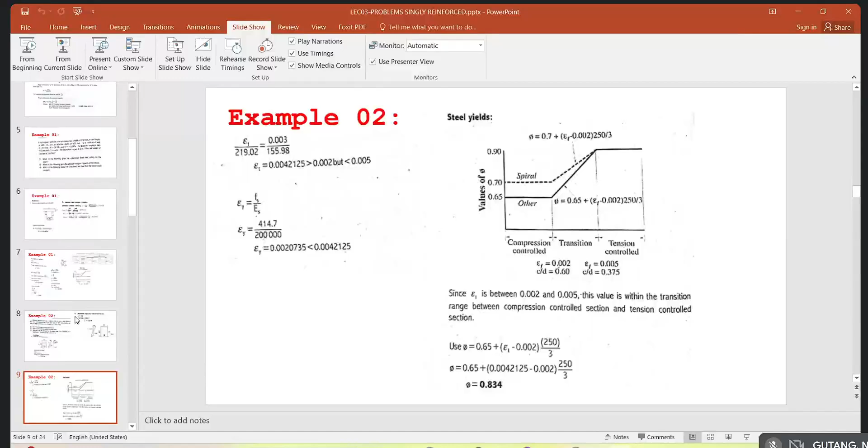Example number 2, ano ba yun? 246.78.

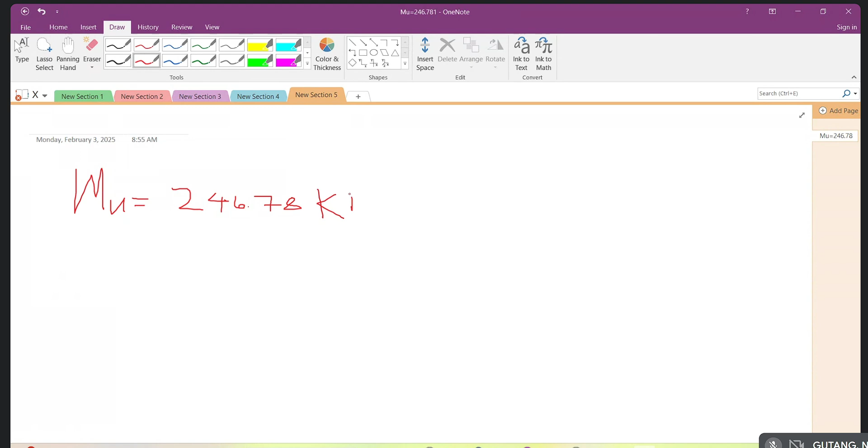Kilonewton meter. Now, so we know that our beam has a span of 6 meters. Ito yun, no? 6 meters. And our dead load is 21.6 kilonewton per meter.

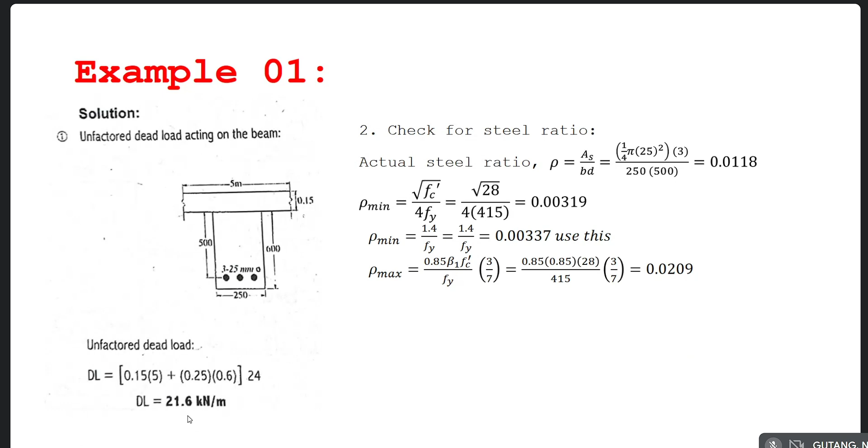So if you notice here, wala siya naghatag, no? If the beam is a simply supported beam or a fixed beam or whatever beam it is. But take note, no? If the beam is singly reinforced beam, mostly it is a simply supported beam. Okay? Kaya singly reinforced man siya, di ba?

Pag singly reinforced yung reinforcement natin is nalang sa tension side. Although naa sa compression side, but we don't need reinforcement at the compression side. So ang kailangan lang ng reinforcement is only at the tensile side. So meaning mura na siya og simply supported beam, di ba? Ang simply supported beam natin ingon ani ang moment diagram is ana lang, which is positive. So meaning we only need tensile reinforcement. We don't need the compression reinforcement.

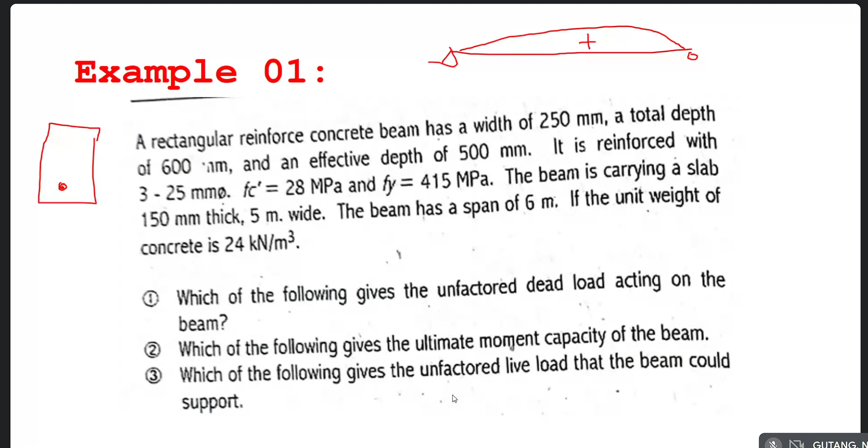So in this case, we are going to assume that the beam is a simply supported beam. So that means our maximum moment becomes WL square over 8. Okay? And from that, we solve for our ultimate load, that is 246.78, ultimate load na to, that is 8 Mu over L square.

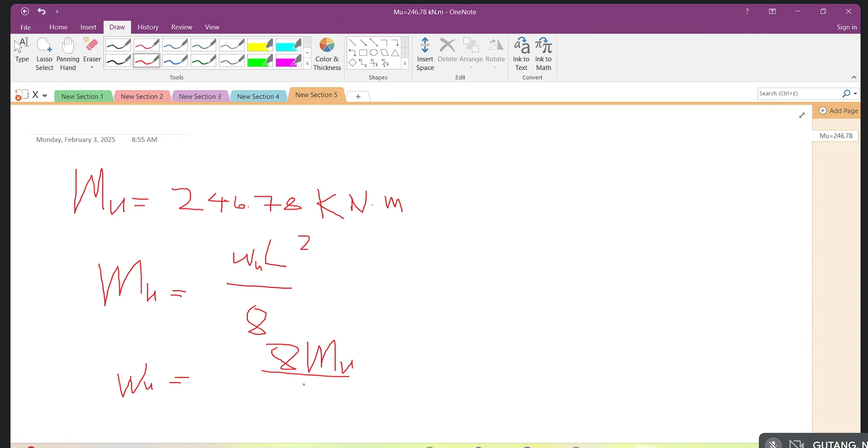So ayan, 8 times 246.78 divided by span niya 6 square, makuha nato ang load or ultimate load. 8 times 246 divided by 6 square equals 54.84 kilonewton per meter.

And from this load, ato rin siya i-convert sa ato ang load combo na 1.2 of dead load plus 1.6 of our live load. So meaning we already have our dead load nga 21.6. So ang atong makuha diri karon is the live load, no? So 1.2 times 21.6 as our dead load and 1.6 times live load.

So meaning we will have now our live load, which is equal to 54.84 minus 1.2 times 21.6 divided by 1.6, that is 18.07 kilonewton per meter. Okay, so this would be our live load.

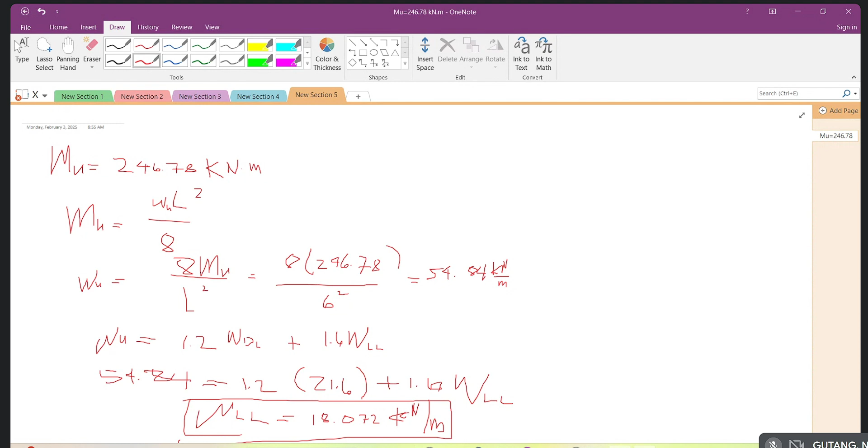Okay, so if none, then let us continue. So please continue for problem number 2. Okay, ayan. So problem number 2.

I think this is almost the same with problem number 1. So ayan. So a rectangular concrete beam has a width of 250 mm and a total depth of 450.

And it is reinforced with a total steel area of 1,875 mm squared, placed at an effective depth of 375. So at least ito given, no? Given ang atong effective depth. FC prime is 27.6 and Fy is 414.7.

So if you notice here, sir, ano man nga ang atong gigamit is Fy kay yielding naman siya largo. So again, it is assumed that the steel is yielding. So that is why the stress here is simply equal to Fy.

So the first requirement is depth of the compression block. Ito yung formula from the strain or the force diagram. So we have the tensile force is simply equal to the compression force. So T is simply equal to C, As Fy is simply equal to 0.85 fc prime A B.

So As is 1,875, Fy is 414.7, 0.85 times 27.6 for our fc prime, A times the 250 depth of our width of our beam. So we will have a depth of compression block of 132.58.

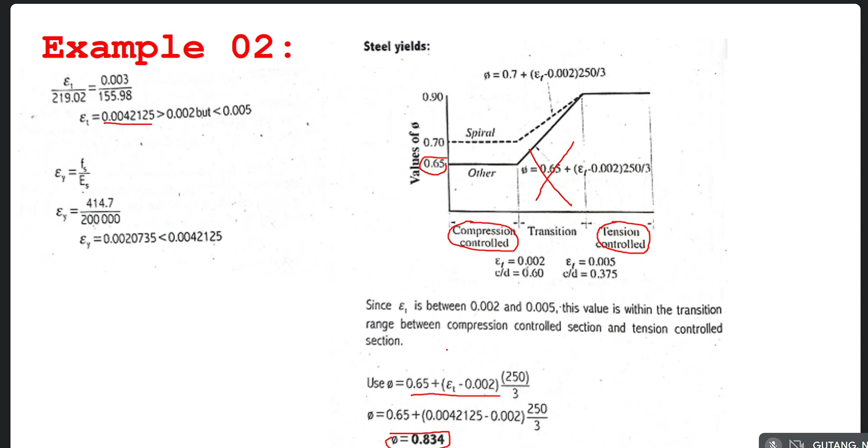So, from the reduction factor, we are going to solve for the live load. But before we solve for the live load, we need to solve first the moment capacity so that we can equate the moment capacity into the load and solve for the live load. So, in this case, determine the safe live load that the beam could carry in addition to a dead load of 220 kilonewton meter.

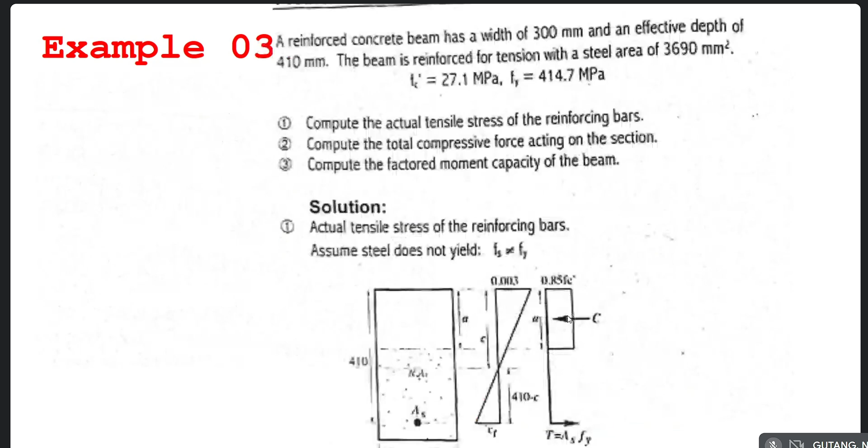Yes, do you have any question or clarification? Question, clarification so far.

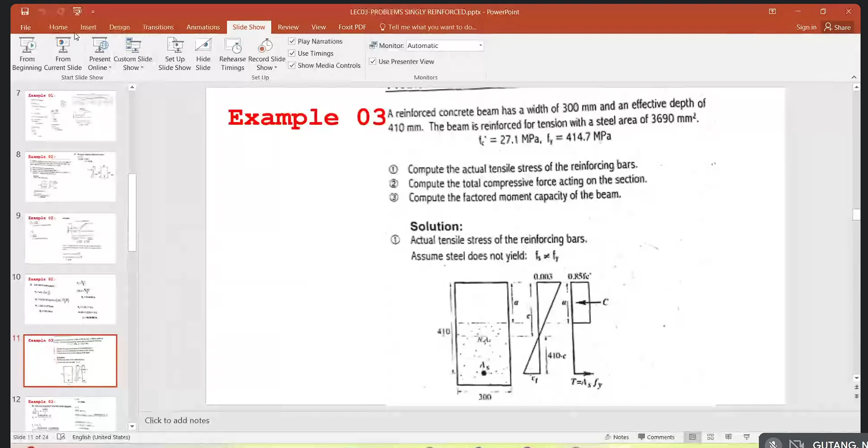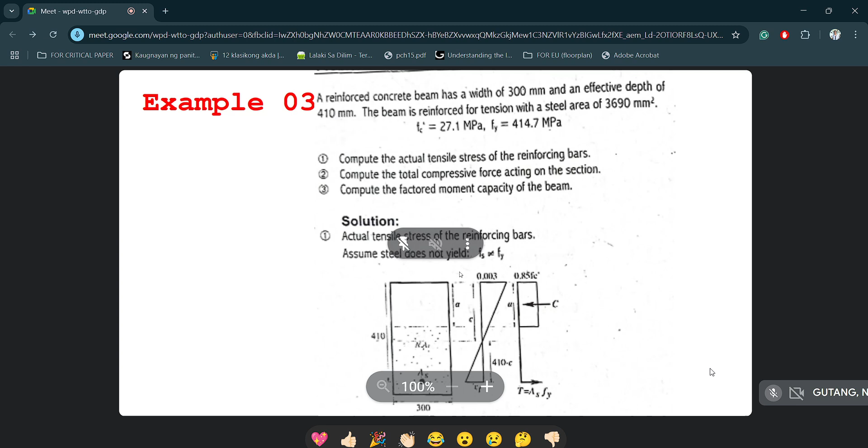So let me check, it seems the steel did not yield here. So, the reinforced concrete beam has a width of 300 mm and an effective depth of 410 mm.

The beam is reinforced for tension with a steel area of 3,690 mm square. So, compute the actual tensile stress of the reinforcing bars, compute the total compressive force acting on the section, and compute the factored moment capacity of the beam.

So, number one, compute the tensile stress of the reinforcing bar. If you notice from the problem, we already know that the steel does not yield.

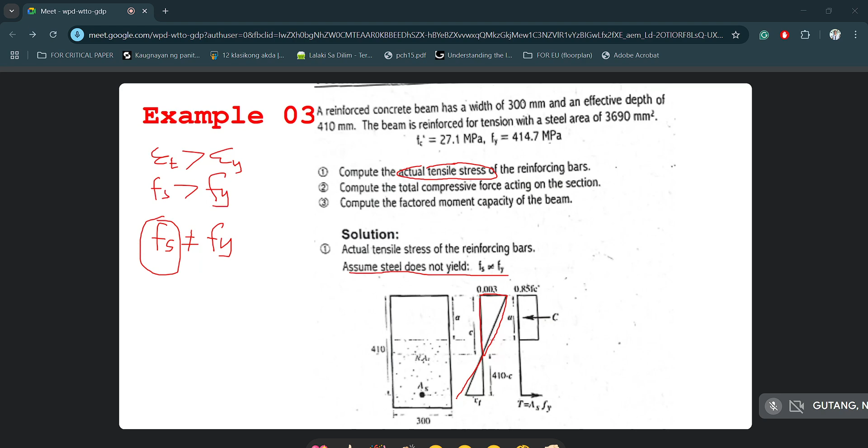We already know the effective depth, that is 410. You can use the solution that I have presented, or we can use this diagram. This triangular shape relates like this: we equate 0.003 over C equals the actual strain divided by 410 minus C. So the actual strain, the formula is 0.003 times 410 minus C, over C.

And we know that the actual stress is simply the strain times the Young's modulus of elasticity for steel. So Fs becomes 600 times 410 minus C over C. Actually, we already derived this formula: the actual stress is simply equal to 600 times D minus C over C. So you should familiarize yourself with this formula.

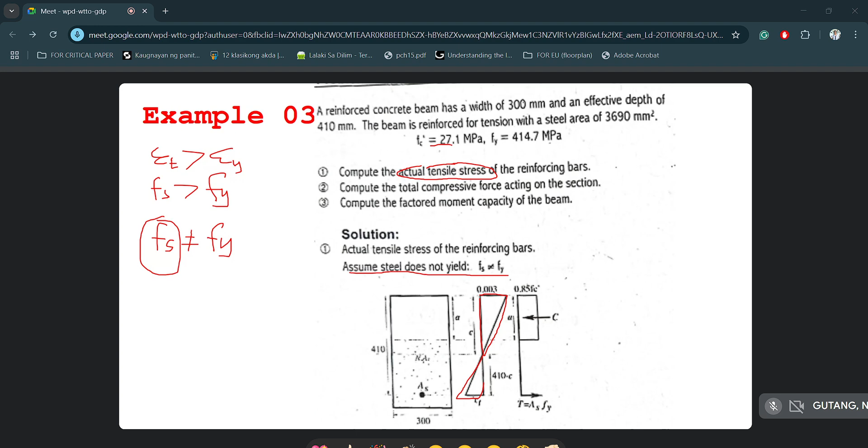I think I have shown this as our previous solution. From this we have this particular formula, and we know that our depth of compression block is simply equal to 0.85 C or beta times C. We know that FC prime is 27.1, which is lesser than 28, so beta 1 is automatically equal to 0.85. From this general equation, C is equal to T. That's what I was saying earlier, that A we are going to equate in terms of C, and then our Fy becomes Fs, which we also equate in terms of C.

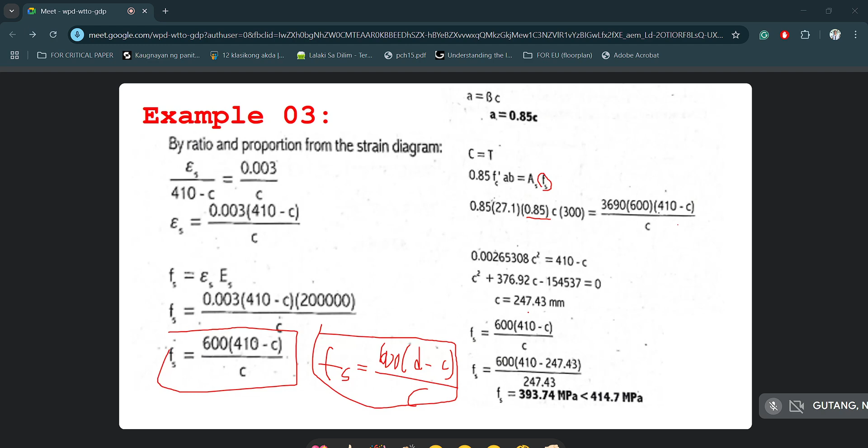But in this case, we continue the solution and derive a quadratic equation, solving for C, which is equal to 247.43. Take note that this is a quadratic equation - it will give you two answers for the value of C. If you input it into your calculator, you will have two values. Please make sure you use the practical value of C - there's a negative and positive value, and you should not use the negative value of C.

So C now becomes 247.43. From this value of C, you bring it back to our formula to determine the actual value of our tensile stress. If you notice here, the actual value of the tensile stress is 393.74, which is lesser than the Fy. In other words, the steel does not yield - the steel really does not yield.

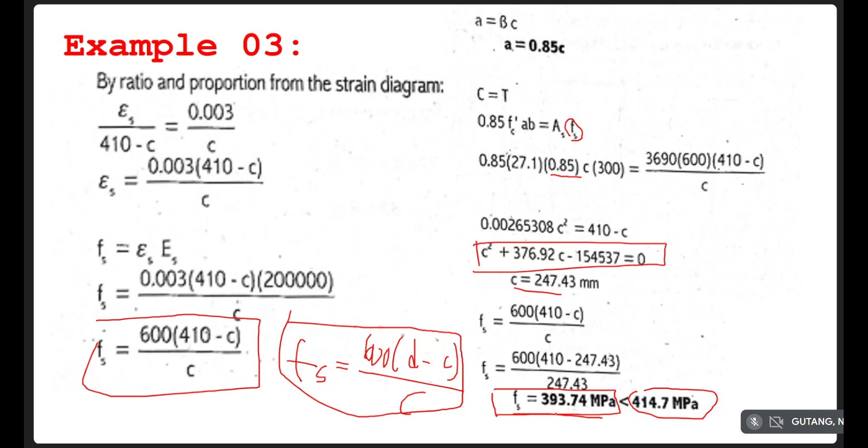So this becomes the actual stress or tensile stress of our steel. Meaning, we are not going to use Fy in this case. In our formula, we are not going to use Fy because the steel really does not yield - it hasn't reached the yielding point. So why use the yielding point when in fact the steel does not yield? Meaning the value of Fs, the actual stress of 393.74, is what governs the stress of our steel instead of the Fy of 414.7.

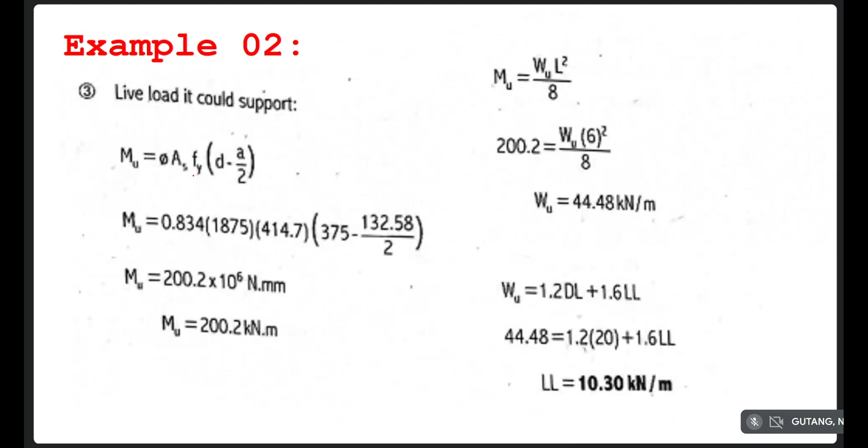Okay, so the second question is question number 2: compute the total compressive force acting on the section. So C - we have a formula for that. We already solved for the depth of the neutral axis C, and we solved for the depth of the compression block: 0.85 of C, that is 210.32 millimeters.

We should keep this formula: 0.85 times 27.1 FC prime times 210.32 - this is our depth of compression block. The width is 300, so we will have a value of 1,453.42 kilonewton. The value you derive from the solution, you divide by 1,000 to make it kilonewton. So this is now the compression force, 1,453.42 kilonewton.

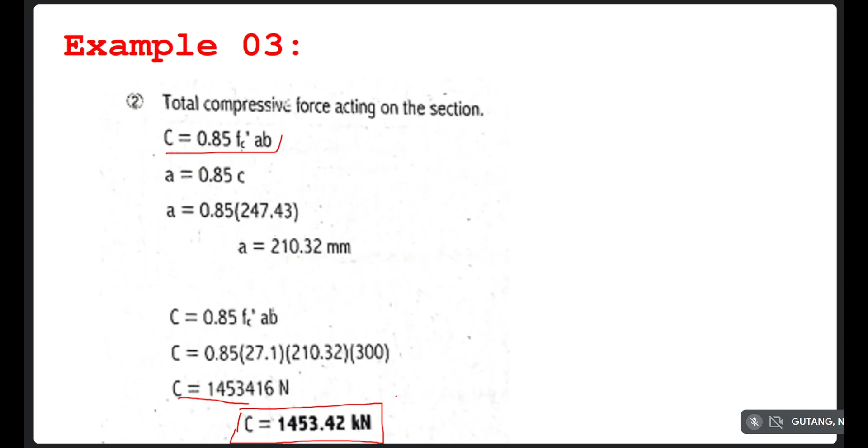And next, the factored moment capacity of the beam. So check whether this is a compression controlled section.

So we check the actual strain of our steel. From our diagram, by ratio and proportion, actual strain is to the effective depth D minus C, as the strain of the concrete is to C. So: 162.57 is to the strain of the concrete divided by C, which is 247.43. So the actual strain is 0.00197.

So if you notice here, the actual strain is lesser than 0.002. It is lesser than 0.002. That means it is a compression controlled condition.

Compression controlled condition. So instead of using 0.9, or instead of using the transition formula from before, automatically we use 0.65 as our reduction factor. From the 0.65, we solve for the ultimate moment capacity using the reduction factor, AS, and the actual stress, effective depth, A over 2. We get a moment capacity of 287.89 kilonewton.

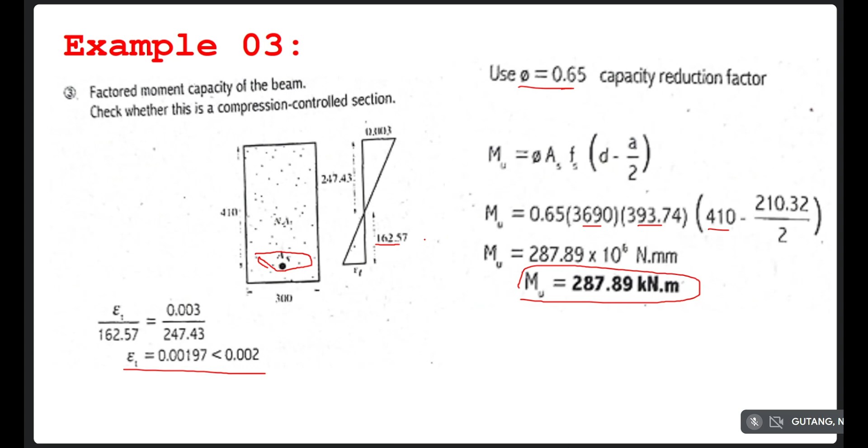It doesn't bend like that. It doesn't mean that adding more rebar makes the structure stronger. Because the tendency is it becomes a compression controlled section, which actually reduces its moment capacity. Alright? Okay.

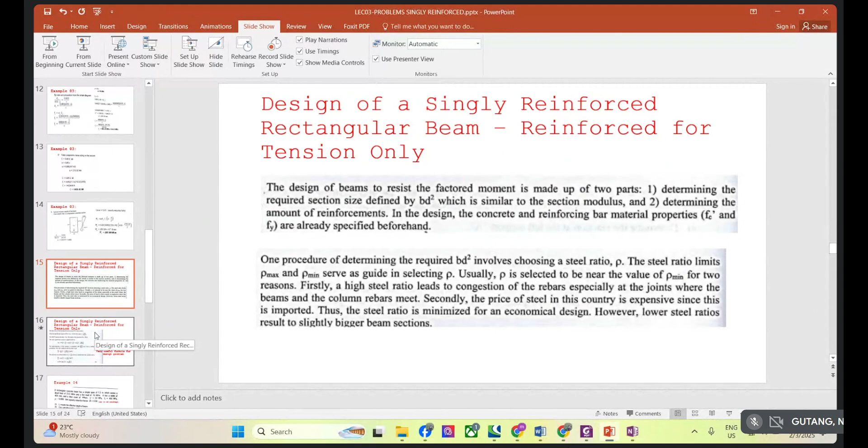Let me cover this part. Okay, so that is how those are the problems involving analysis of singly reinforced beams. So let us now proceed to...

Design of a singly reinforced beam. So the design of beams to resist a factored moment is made up of two parts. Number one, we first determine the section: the width and the effective depth, which is governed by the section modulus, and of course we determine the amount of reinforcement.

So it's kind of the reverse. If it's an analysis problem, the sections and the reinforcement are already given, and we solve for the moment capacity. For the design problem, it is otherwise. We are given the load or the moment, and then we design the sections and determine the amount of reinforcement.

So in this particular problem, the FC prime and the Fy, or the compressive strength and the yield strength of our steel, are already specified or given. Of course, it's given because you decide what design mix to use for the compressive strength, or what grade of reinforcement to use, like grade 60, grade 40, or grade 33/34 steel reinforcement. So you decide on your design strength.

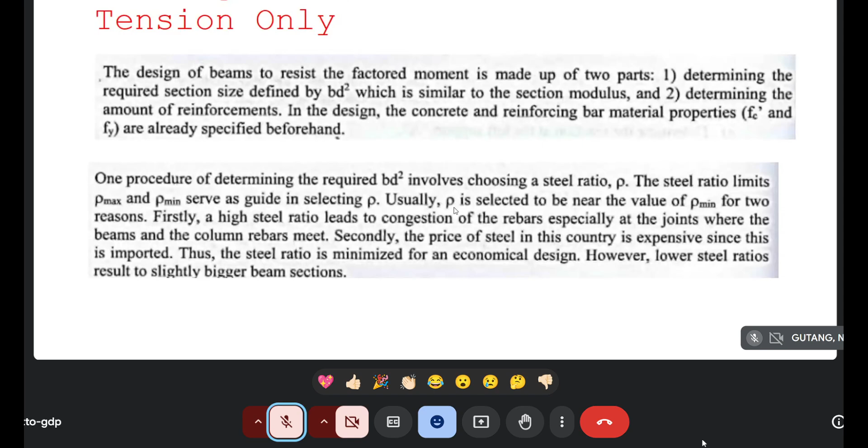The first is that a high steel ratio leads to congestion of rebars, especially at the joints where the beam and column rebars meet. Meaning, if you use too much reinforcement, the main problem is that it won't fit, it won't fit into the given section.

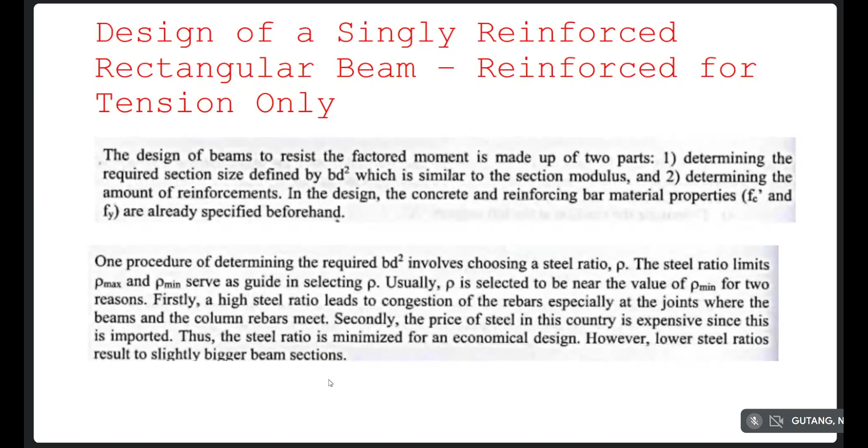The moment capacity is simply equal to the reduction factor, Fc prime, B, d square, omega. This omega is equal to the steel ratio. Let me write it here: omega is simply steel ratio times Fy over Fc prime, times the quantity 1 minus 0.59 of omega.

Okay, so let's have a sample problem. A rectangular concrete beam has a simple span of 7.2 meters, which carries a dead load of 23.5 kilonewton-meter and a live load of 16 kilonewton-meter.

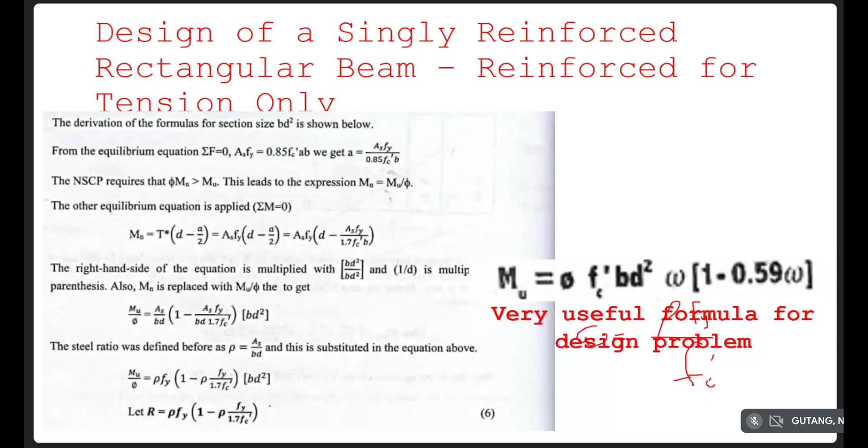The coefficient of resistance, R sub n, is simply equal to mu over reduction factor, B, d square. So later on we will manipulate this.

So from this reinforcement index, new formula: coefficient of resistance equals Fc prime, reinforcement index, times 1 minus 0.59 of the reinforcement index. We will have an Rn of 3.0.

And then, this formula is the coefficient of resistance, R sub n, so mu becomes reduction factor times B, d square, times R sub n. And then we use it here: B d square is simply equal to mu over reduction factor, all over Rn.

We know that Rsub n is equal to 3, reduction factor is 0.9, given width is 400, and the moment is already solved with a value of 348.62 kilonewton meters. We convert this into Newton millimeters, that's why we added 10 to the power of 6. So d now becomes 568 mm.

So the good thing about a design problem is that you can adjust the given answer. For example, 568 - you can use 568, 570, 575, or in this case, the solution uses 580. The answer for this is not practical for workability.

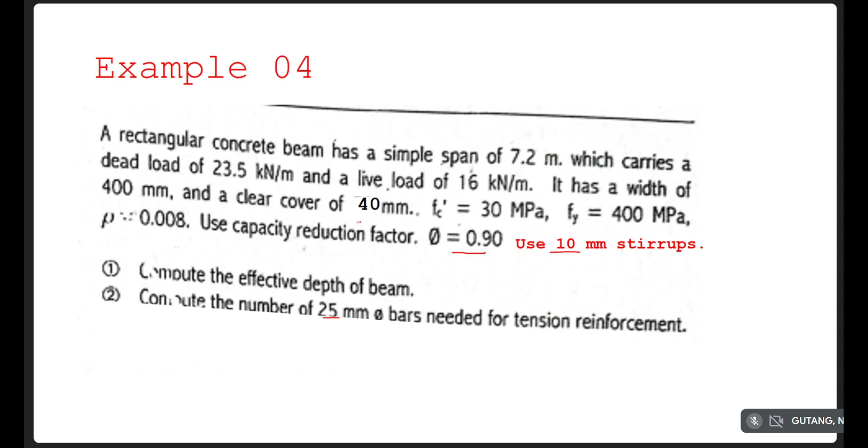So meaning if you have stirrups here, this becomes your stirrup, this 10 mm. This is the clear cover of 40. Our effective depth is measured, but only for a single layer, so it's measured here at the center of our reinforcement. So this becomes the effective depth, which is 580.

So meaning to get the total depth, we need to add half of the diameter of our main steel reinforcement, the diameter of our stirrups, and the clear cover. That's why it's 50, which is 40 plus 10, and the 25 is half of our main reinforcement. So we will have a total depth of 642.5.

Same thing - you need to adjust it to a specific condition that's easy to measure in actual construction. So in this case, it becomes 650. You could use 640, but the requirement is 642.5, so you could also use 645 - it's up to you. But the tendency is if you use 645, that 5 mm will be very difficult to achieve in actual construction.

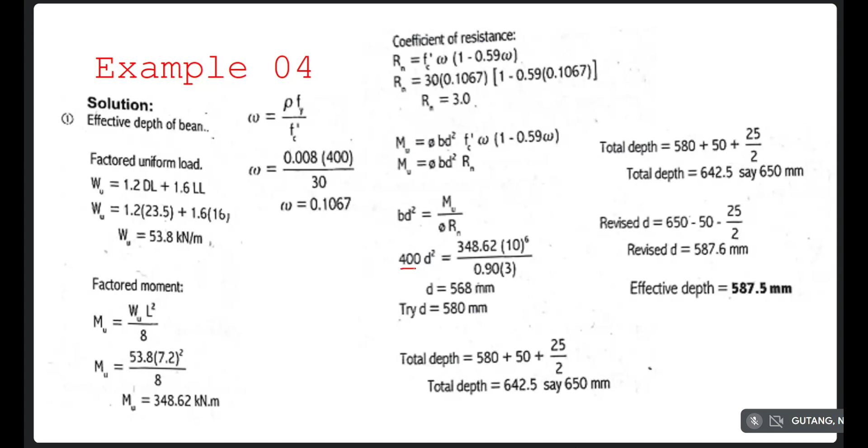This example number 4. This is the procedure to solve for the effective depth, provided that you have the given width. But if you don't have the given width, then that's the time you're going to assume it. There are assumptions on how to solve for the given values, but the tendency is, with different assumptions, you will have different answers.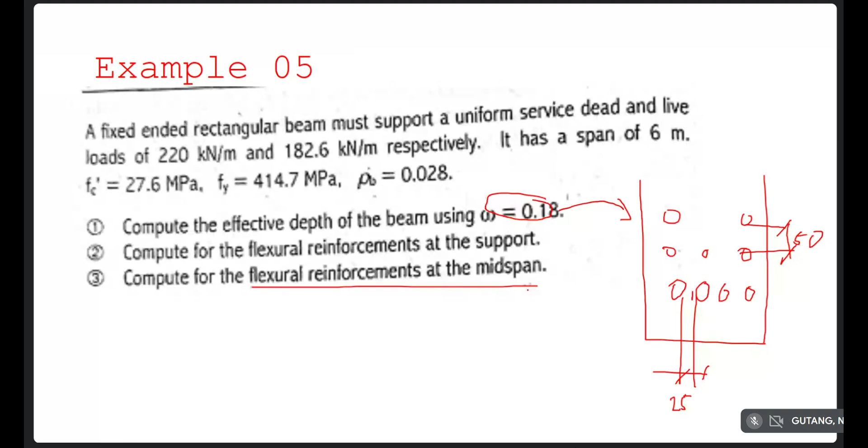So I have presented this formula a while ago. We are going to use this since we already have our dimensions. Substituting the values, we have a reinforcement index. The result of this is a quadratic formula for our reinforcement index, giving us a reinforcement index of 0.0814.

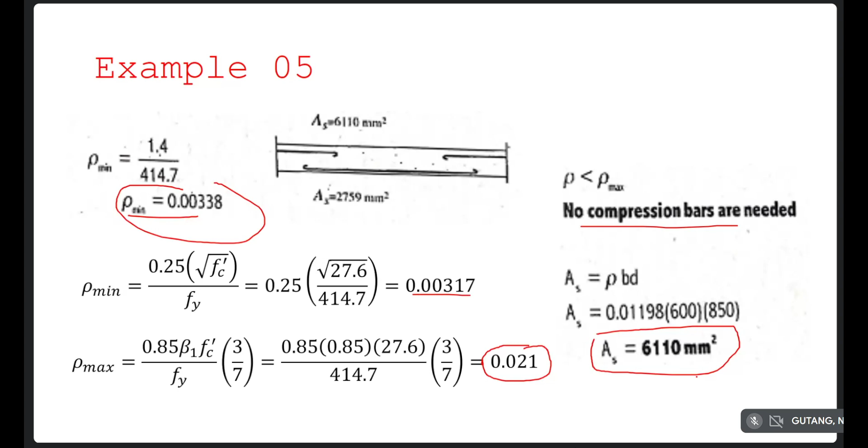So in this case, both of these reinforcements, at the support and at the midspan, are only solved as an area. Meaning, if you want to convert it in terms of the number of bars, that's the time you're going to decide.

Now, what would be the number? What would be the size of the bar that I'm going to use? For example, let's say we have a width of the beam of 600. So, assuming we have a cover for our stirrups, this would become our main reinforcement.

For example, if I'm going to use 16 mm, the number of bars I need would be calculated by dividing the area, times 2759. So the number of 16 mm bars becomes 13.7, so we'll say 14.

So just imagine, 14 bars arranged in a row, the tendency is they will be too crowded, too congested with reinforcement. So that means I need to make sure that the 25 mm clear spacing is achieved. That means if I insist on using 16 mm bars, I need to adjust my reinforcement arrangement; I should make it into 3 layers.

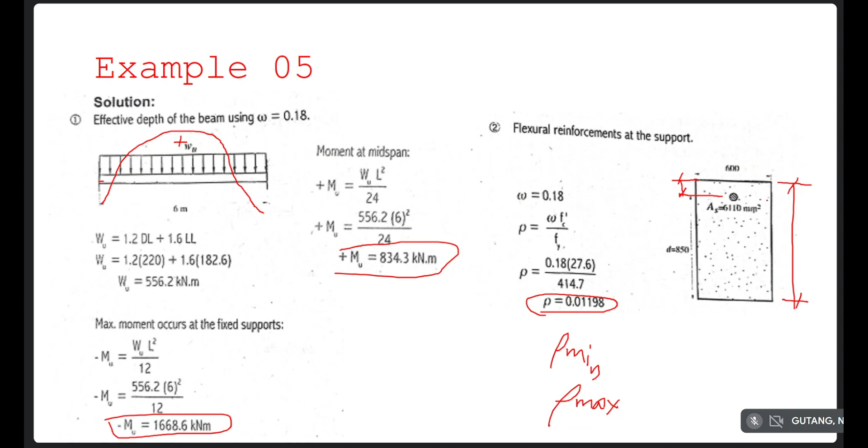And if it becomes 3 layers, the solution now becomes invalid. Why? Because the effective depth here is solved, derived based on the assumption that it will only be in a single layer. So, meaning I need to reevaluate my solution, wherein I need to change the value of the effective depth, and solve it again. That will be the actual design.

So the second option is I could use a bigger bar size. For example, if I use 25 mm as my main reinforcement, the tendency is the number of bars I'll need becomes only 5.62, say 6 pieces. This time, I can arrange it so that it's a single layer only.

That's the concept for the design procedure. So of course, as a designer, it's up to you to decide on your reinforcement arrangement and so on.

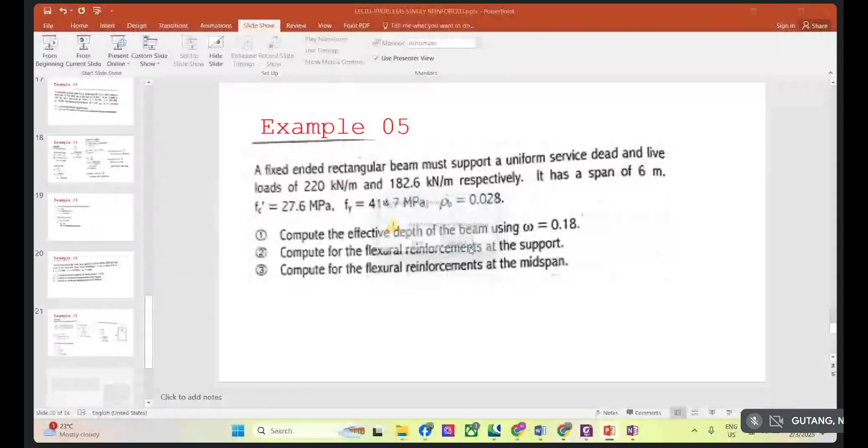All right. So, do you have any question, clarification? Yes, Mr. Apa.

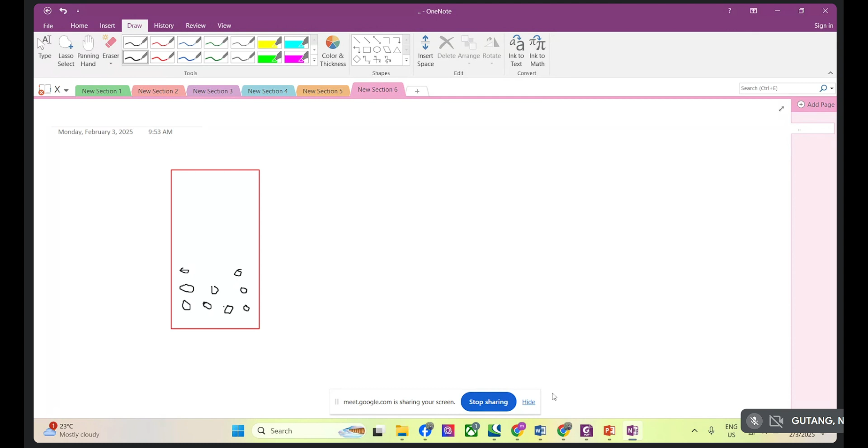Just imagine the bars are staggered, straight in line. Then we have these distances. So for example, this is 60, this is 30, and this is 30. So this would be our reinforcement setup.

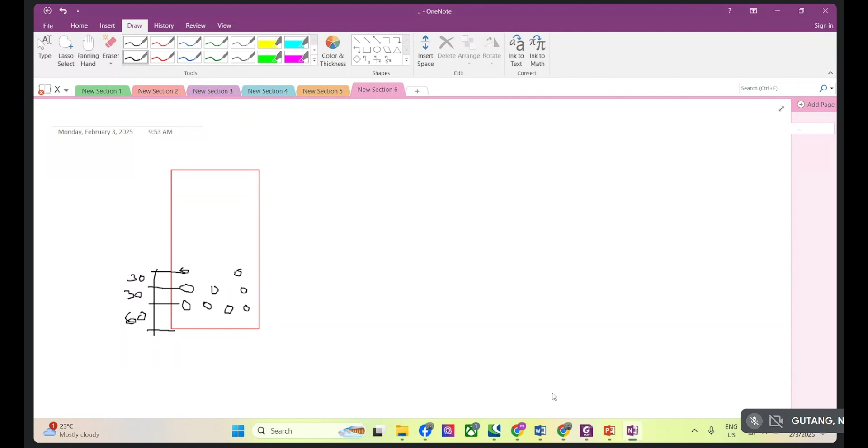So for example, this is our beam. Of course, our effective depth now will be measured from here going to here, wherein we don't know what this distance is. We don't know what this is.

Say this is x bar. We don't know what this particular distance is. This will become your effective depth. So what we are going to do is to solve first the centroid of these reinforcements.

Now, we need to solve first the centroid of these reinforcements. So it's like this, right? Our centroid, from statics.

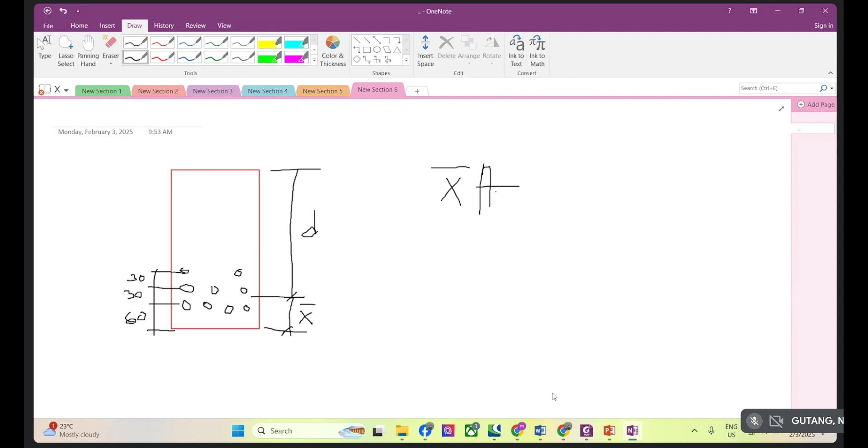I think this is the last part of statics, is simply: total area times x-bar is equal to the summation of area times x, or if I use y, it's y-bar.

If it's 16mm bars again, you need to solve for the area of the 16mm, then look at the second layer and another reinforcement at the third layer.

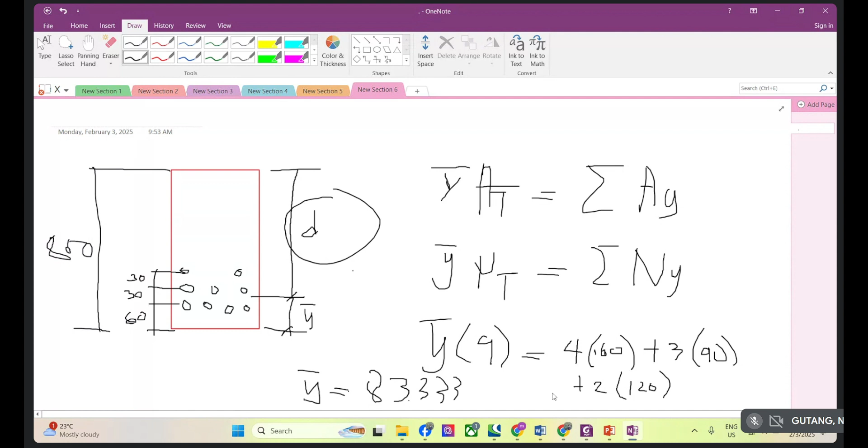Okay? Did I answer your question? Let me go back here. This time I am using the number of bars, but it could be that you will use the area, especially if the diameters are different, meaning it will have different values of steel area.

For example, this is 25mm, this is 20mm, this is 16mm. So do not use the number of bars for that matter; you need to really use the area of each layer.

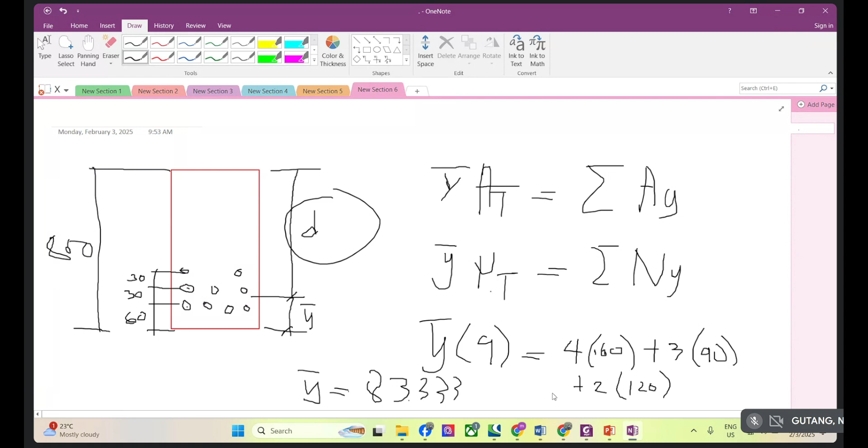Alright, so did I answer your question, Mr. Apaap? No response from Apaap. Where did he go? Any other question or clarification? If none, then allow me to check the attendance.